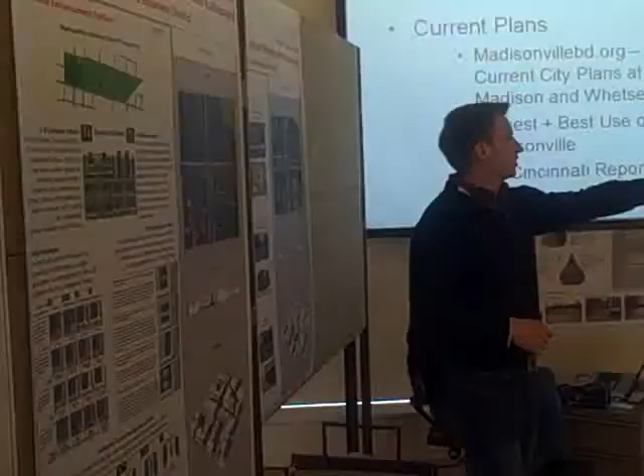Christian Gilsman is a junior in urban planning. Brandon Ramos is also a junior in urban planning. Terry Wilson is a grad student in community planning, and I'm David Watkins, a sophomore in international affairs.

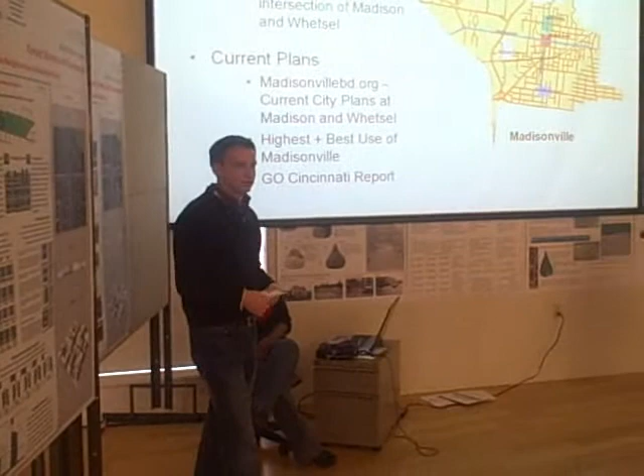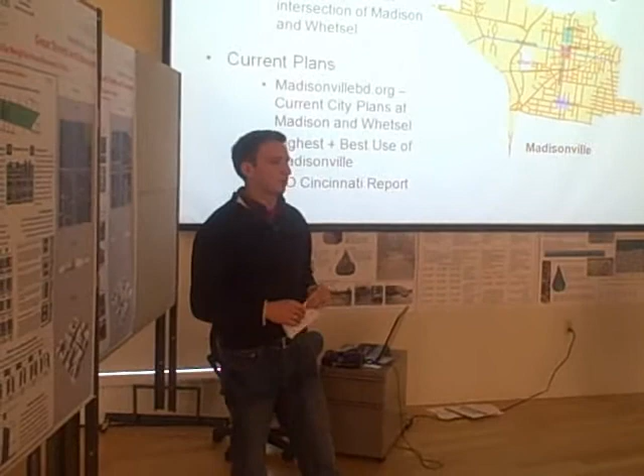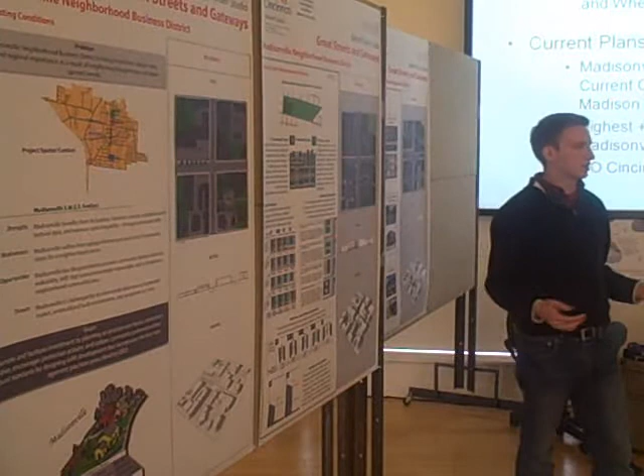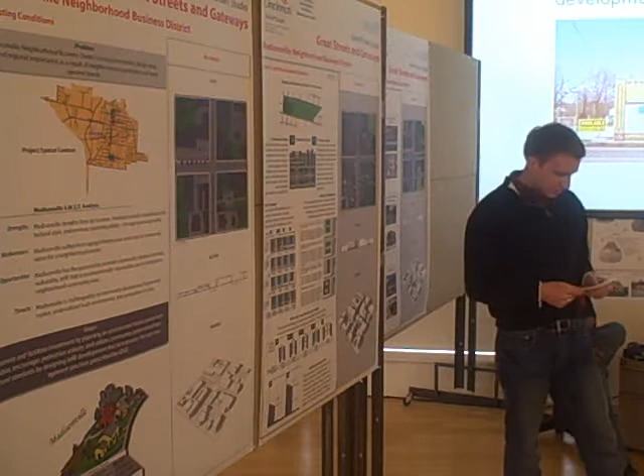Hopefully I'll be able to guide you on these topics. When we started to assess what was going on in the Madisonville business district, and what the community vision was, and talking with the community council leaders, the business association, and citizens at community council meetings, we came up with a problem that seemed to apply to the entire business district: it was losing investment, design integrity, and regional importance as a result of neighboring transportation and development trends.

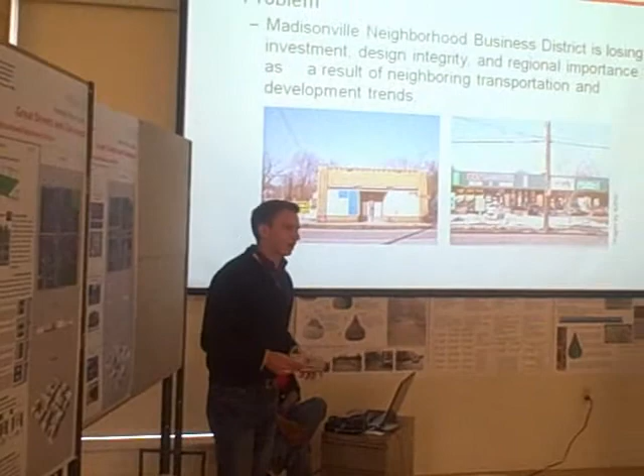Here's Madisonville, here's Hyde Park. So with that premise, we established a vision statement for what we wanted to envision for the community.

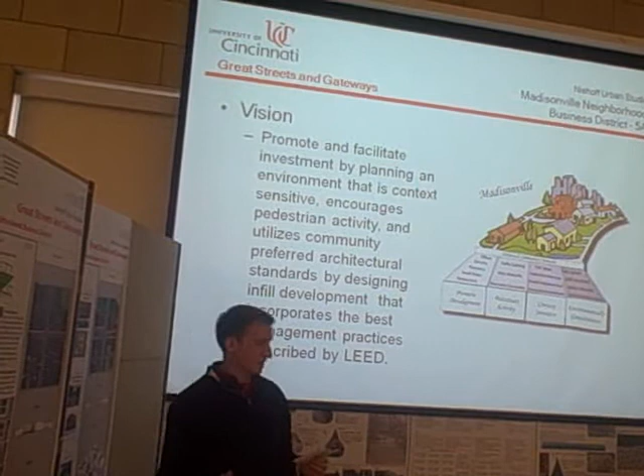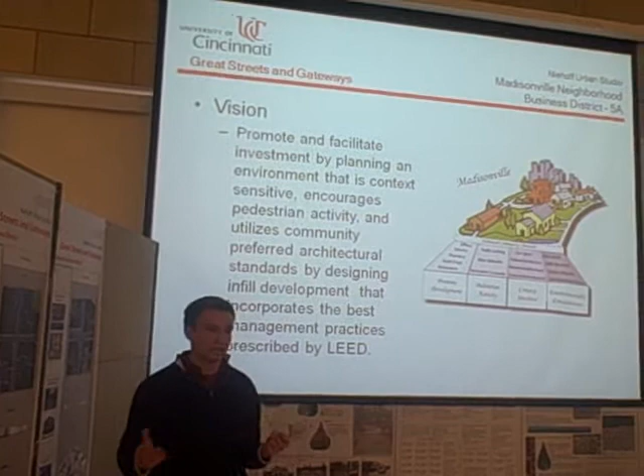That was to promote and facilitate investment by planning an environment that is context sensitive, encourages pedestrian activity, and utilizes community preferred architectural standards, by designing infill development that incorporates the best management practices prescribed by LEED. Our posters show the no-action plan, which is just the current uses, and then we looked at form-based code as well as placemaking.

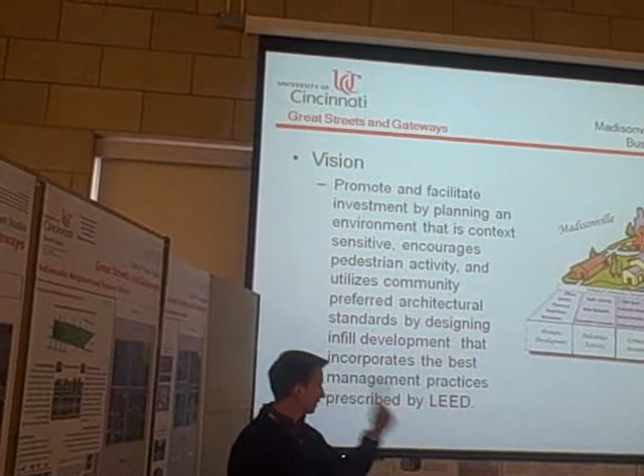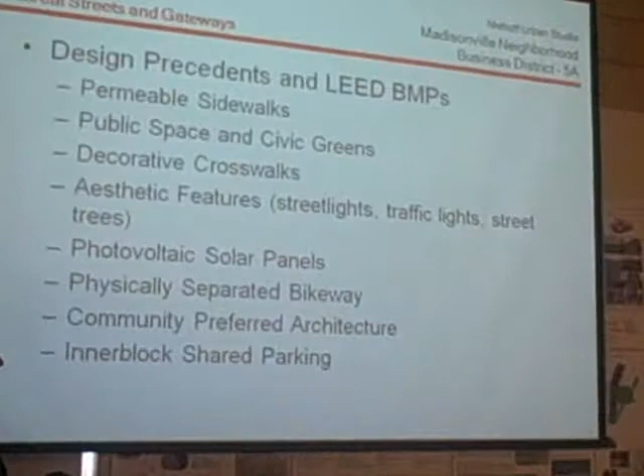Some of our design precedents that we wanted to keep in mind for both schemes, form-based code and placemaking, and we'll get into why we gave two alternatives for the future of the core area of the business district.

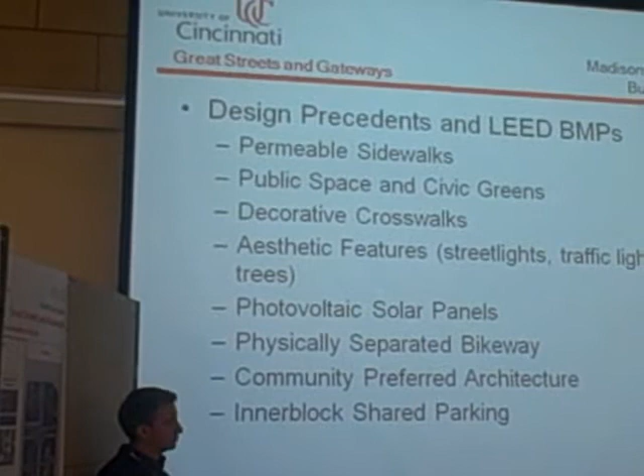One is permeable sidewalks. We noticed that the health of the sidewalks through the corridor were extremely lacking and at times dangerous. Some of the street trees caused buckling in the concrete, so we proposed...

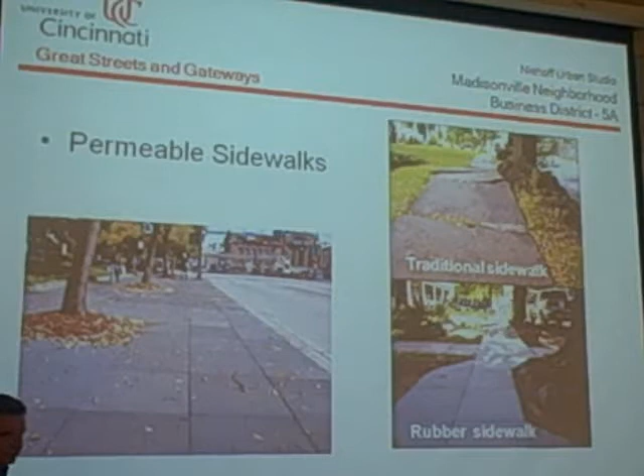We proposed rubber sidewalks, which allow a more permeable surface for rainwater and runoff to actually saturate the ground underneath those walkways, allowing the root systems to be more organic rather than suppressed, and affecting the public pedestrian environment.

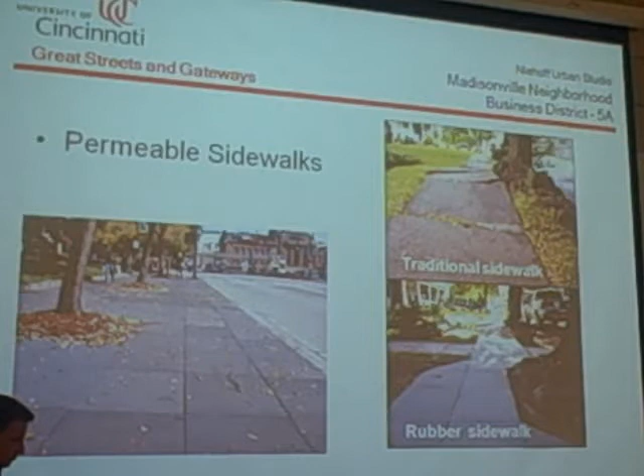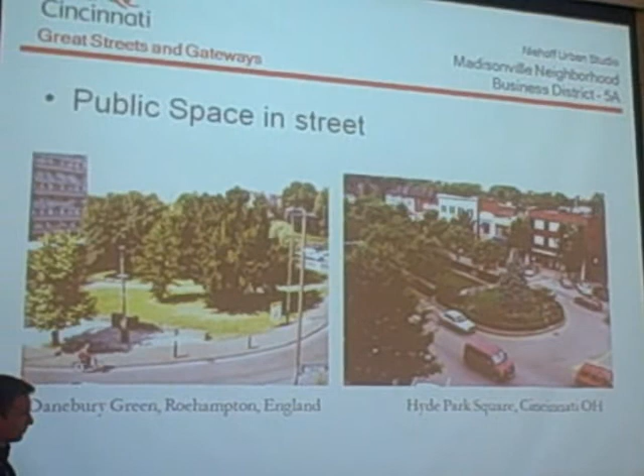Public spaces in the street. We have two precedents here: one in England, Danebury Green, and a more local favorite, Hyde Park Square. The latter of the two we used more as a precedent for placemaking, which you'll see soon, in terms of actually rerouting some of the traffic and creating a public space within.

Decorative crosswalks. We wanted to stay away from what you've seen in certain areas with brick-laid sidewalks in the path of traffic. That's an issue with maintenance—when they actually maintain the roadways, that can impede progress and even be costlier when you're constantly repaving or working around that brick-laid crosswalk.

And then aesthetic features—this precedent is from Sidney, Ohio. This is actually more in line with our form-based scheme, where the street lights are compliant with T5 standards and the Smart Code version 9.2 manual.

And then traffic lights—actual suspended traffic lights that don't utilize the current scheme that you see these days, majority-wise in Cincinnati, which is just suspended by a wire.

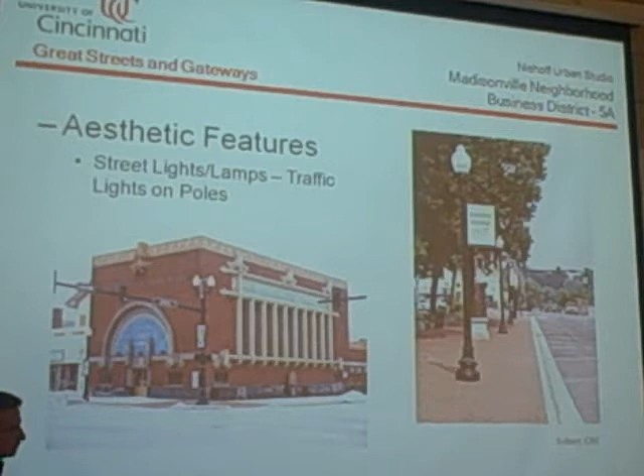And then photovoltaic solar panels, which give an opportunity for incentives to be pulled from the LEED-based infill that we're looking for.

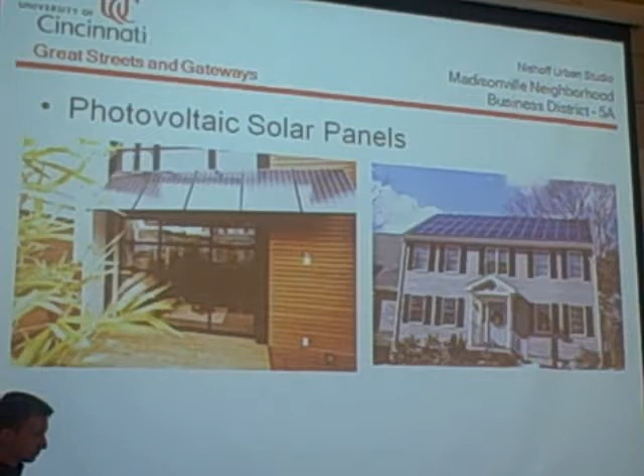There are a lot of different programs, like community reinvestment areas, in the city of Cincinnati for either new construction or improvements for development. If you're going for a LEED certified project, you can get 100% of your taxes abated. So that's one scheme that we're looking at.

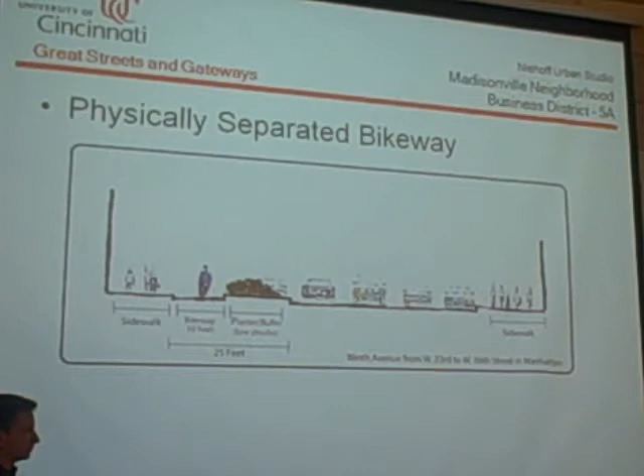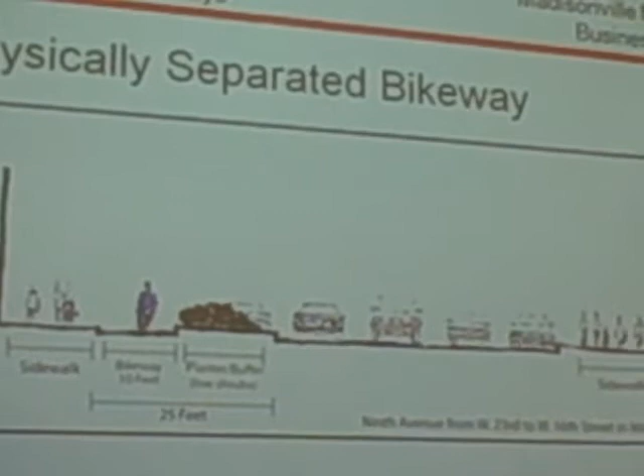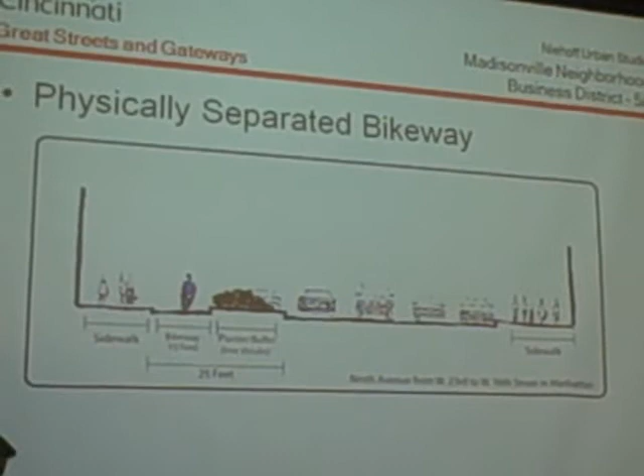And then physically separated bikeways—we looked at a plan to physically separate a bikeway based on a European idea in Midtown Manhattan, where instead of having your bikeway parallel and against the roadway, you have either a planted buffer or a parking lane as the buffer instead, with the bikeway along the sidewalk instead of in right-of-way traffic.

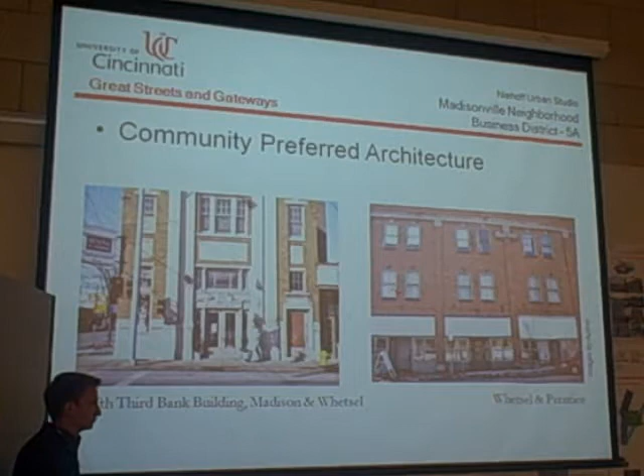And then community preferred architecture, which we outlined with three notable buildings. This is a retail mixed-use establishment, Whetsel and Prentice. And then the Fifth Third, or the Savings and Loan building, at Madison and Whetsel.

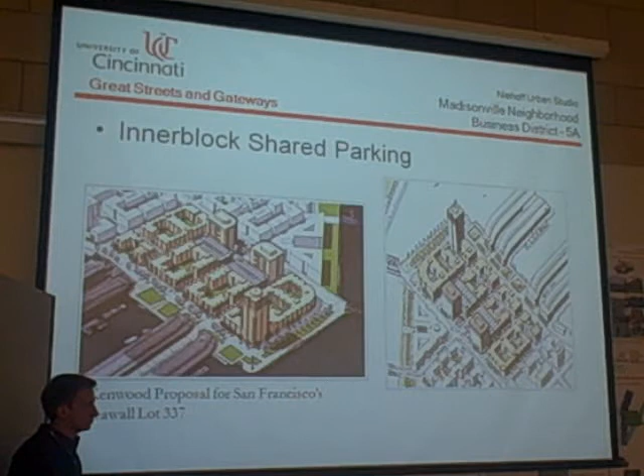And then innerblock shared parking. We felt that in order to enhance the viability of a multimodal, pedestrian-favored business district, we needed to eliminate a lot of the access points to private parking and in-between lots. Doing that allows us to create infill opportunities with existing parking lots and access points.

I'll take over here. We proposed two design alternatives. The first, form-based code, was more in response to the community pushing for that, and the studio in general pushing this as something the community had wanted. The second is a placemaking approach, which is more about beautification and making a place that's notable and that people will know as a region.

Next slide. I chose to do form-based codes because they're adaptable—any community can have them. A charrette process is usually the predecessor to it, so you can design with the community and get some sort of consensus on what they find as community-preferred architecture and so forth.

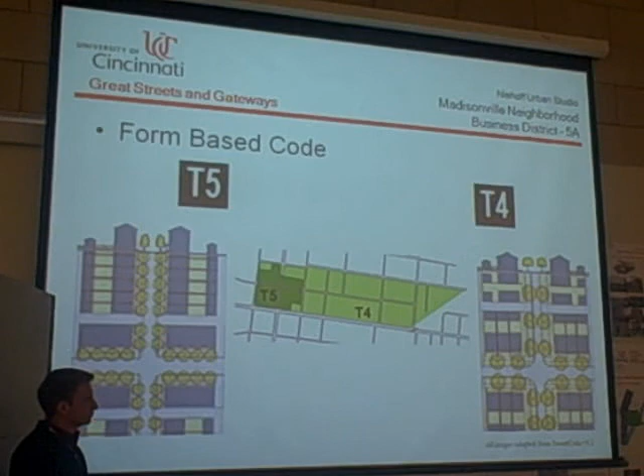We chose Smart Code version 9.2 to do most of our design work. Here are some examples—we used two different districts, the T4 and the T5. The T5 is at the intersection of Madison and Whetsel, and the T4 is the abutting neighborhoods. Next slide. Form-based codes—here's an example of it.